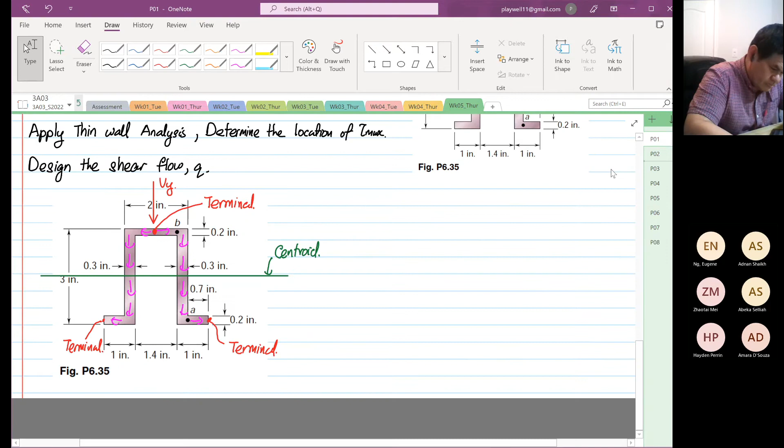And I'm going to paste on the next. Okay, I'm going to take this whole thing across.

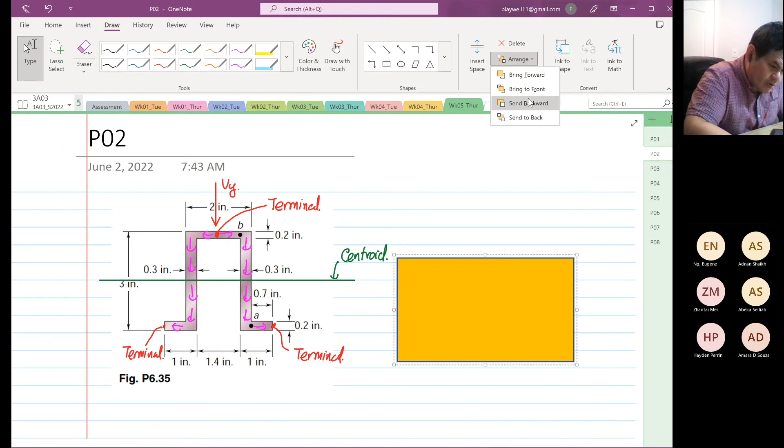If we were to cover the bottom, okay, if we were to cover the bottom, oh, I think I need to bring forward all the way. Okay, if I were to cover the bottom, okay, and expose the top only, right? What does this structure look like?

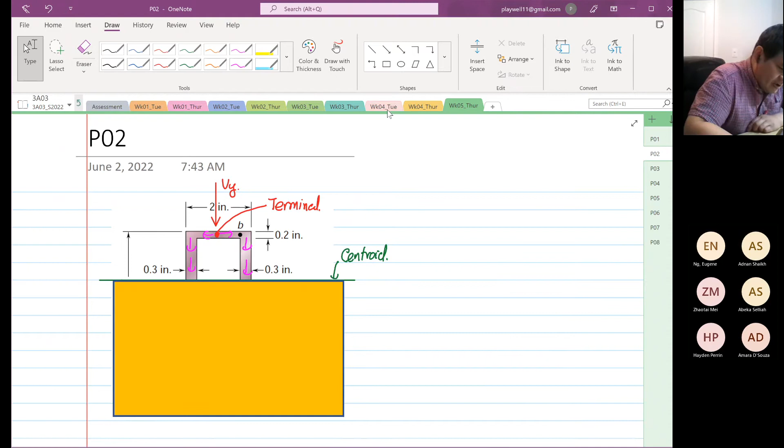Before I give you an answer, I want you to look at this also. Okay, I want you to view this also.

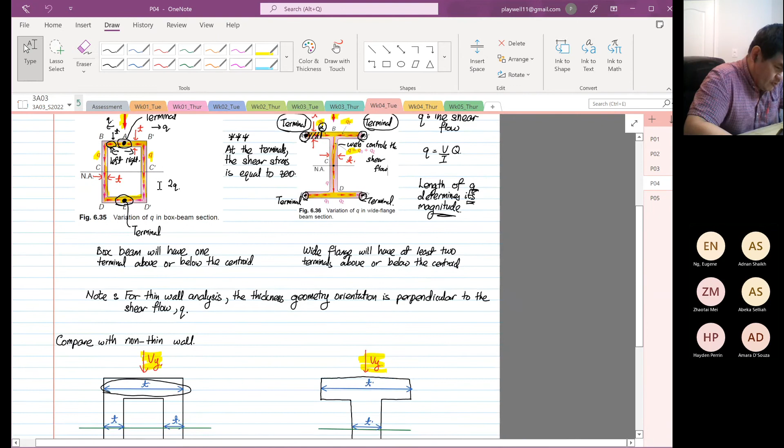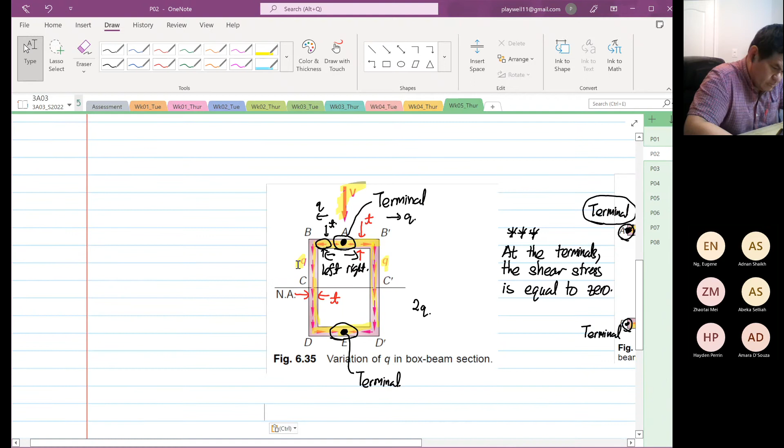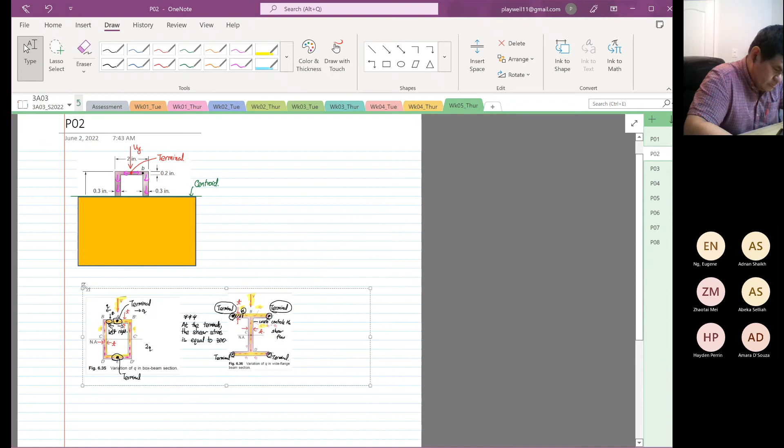And I'm going to shrink it. Okay. So you can observe, right? If I were to cover the bottom, right, the top, what does it look like?

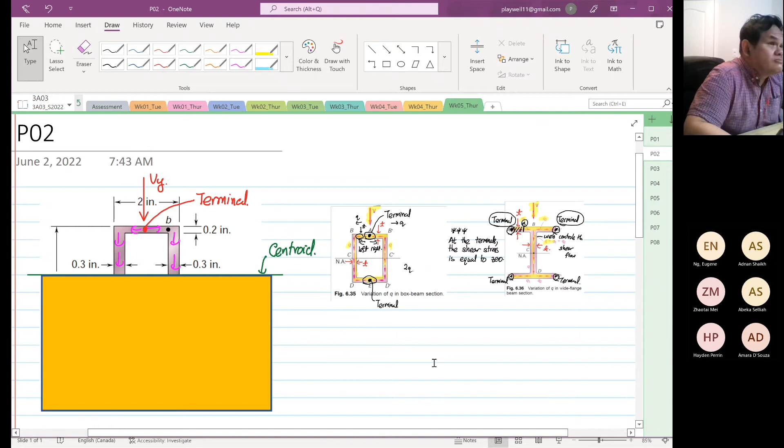Anyone? Is it a box beam or wide flange? Anyone? I hope you're there. Box beam, you are absolutely right.

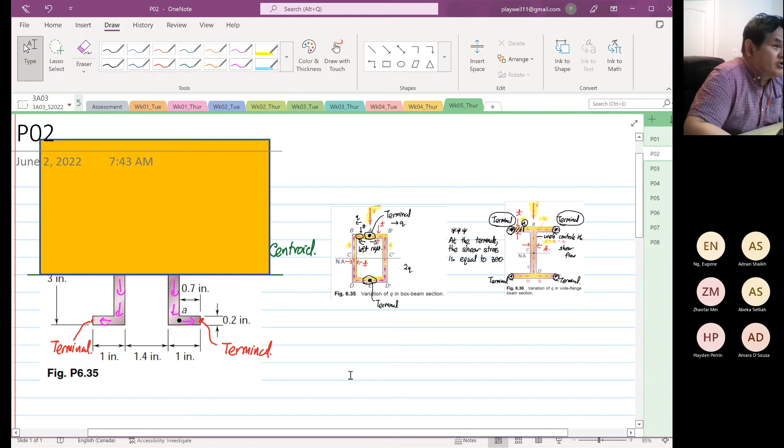Now, if I were to cover the top, right? Cover the top, right? Now it looks like what? Wide flange, yes or no? Right? So that's the confusing aspect of this question.

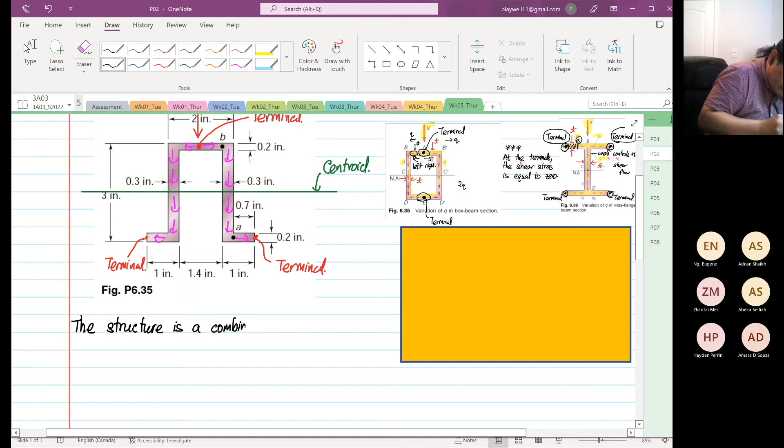Okay, so we realize that this structure is a combination of what? So we realize that the structure is a combination. It's a combination of box beam and wide flange.

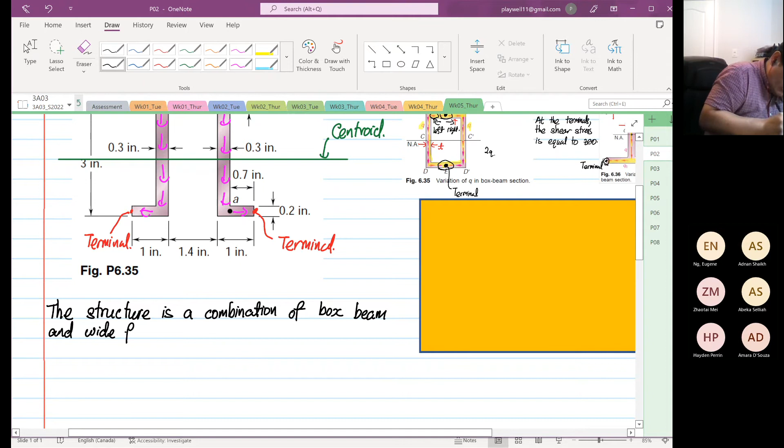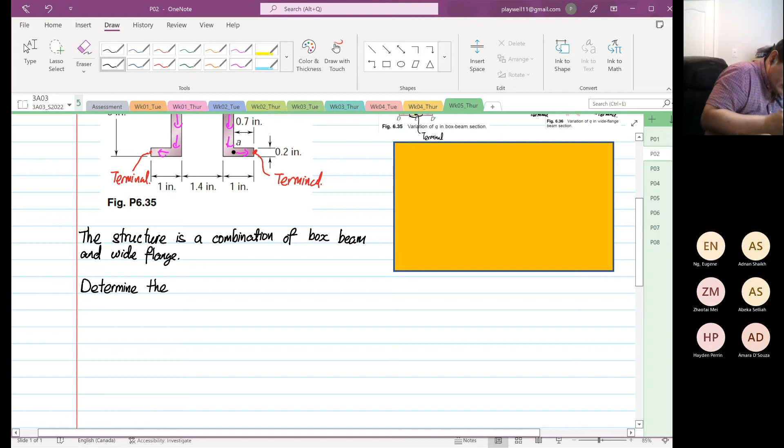Okay, so we are going to find the shearing stress at point B first. So the first thing we're going to find is we're going to determine the shearing stress at point B. Okay, at point B.

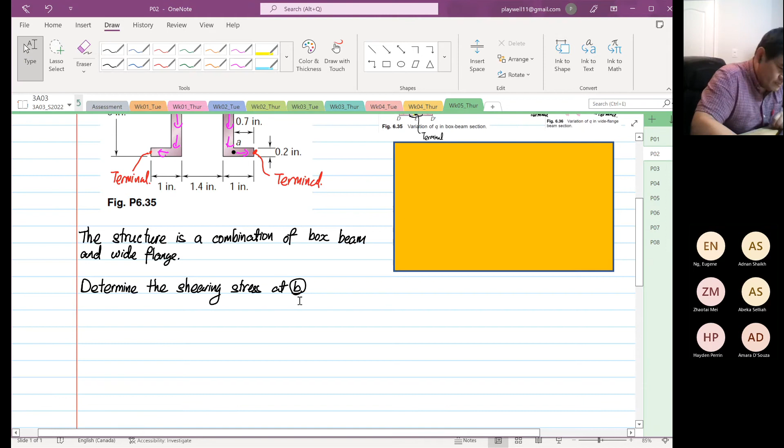So I'm going to again take the whole thing. Maybe I just take the image. Okay, we're just going to find point B.

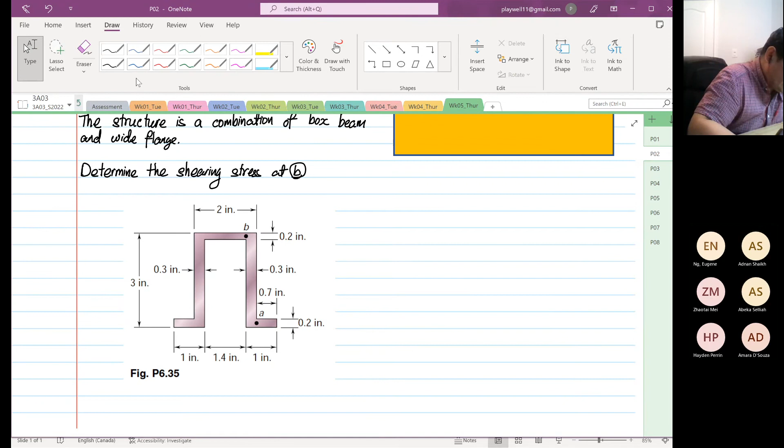Now, based on observation, okay, by looking just based on observation, we can more or less draw where the centroid is. Okay, so the centroid is dead on the center.

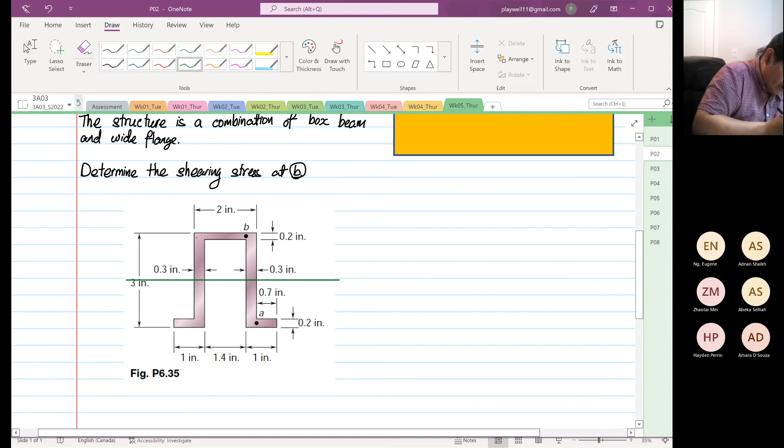Why is it dead on the center? If you look at the flange at the top, it is 2 inch by 0.2 inch, right? So if you look at the top flange, which I'm going to highlight now, right, and if you look at this geometry over here, this is also 2 inch by 0.2.

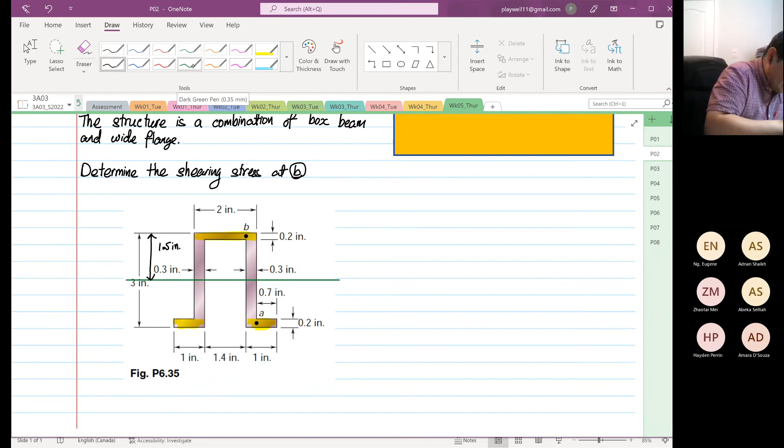Okay, so the first moment of area at the top and the bottom where I put my centroid line is exactly at that position. So we are aware that the distance from here to here is 1.5 inch. Okay, so we know that this is our centroid.

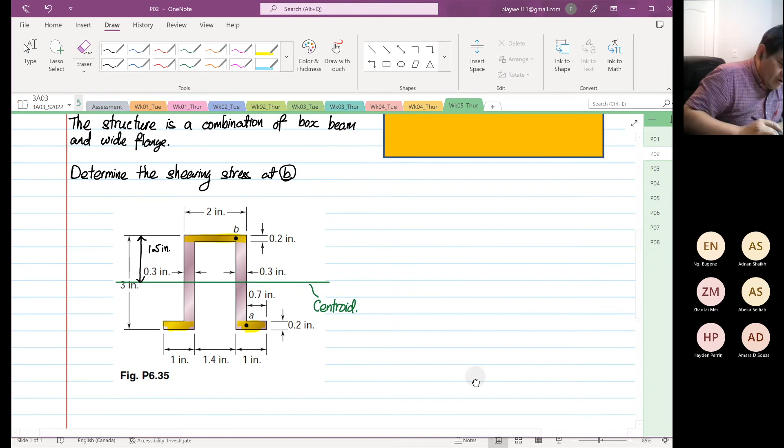Okay, so now we would like to determine the shearing stress at point B. But before I go on, we know that the formula we're going to use is shearing stress is equal to V Q over I T. Okay.

Now, what we were given is that tau max is equal to 10 times 10 to the power 3 psi. Okay.

So if we were to look at tau max or this formula over here, right, we know that the terms highlighted in yellow now, right, these two terms are constant. Okay, they are constant. Now where the location of tau max, okay, so tau max will occur either...

Either at Q max or T min, minimum thickness. Okay, and because we are doing thin wall analysis, at point B, the thickness is in this direction, right? At point A, the thickness is also measured in this direction.

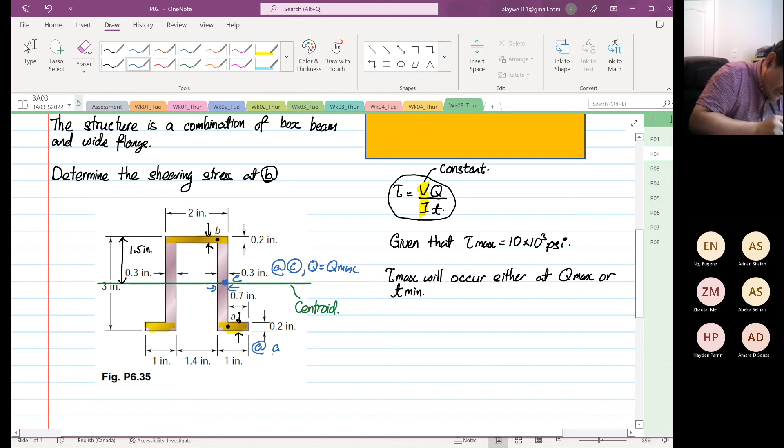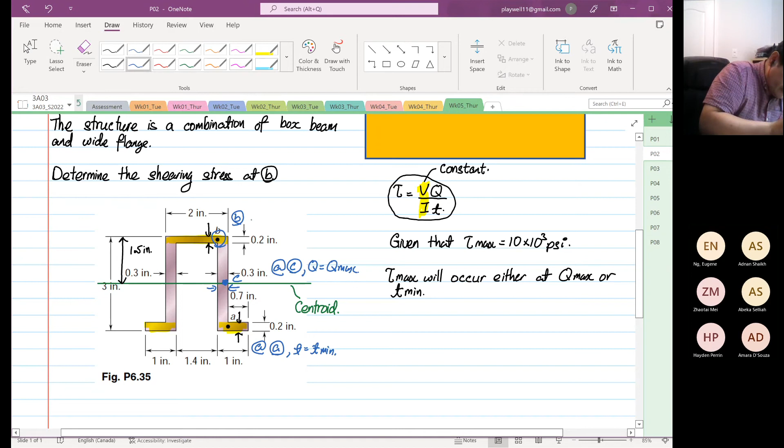But at point C, right, we know that Q is going to be at its what? Q max, right? And we know that at point A, right, T is equal to T min. And likewise at point B, right, T is equal to T min.

Okay, so the statement that we make that tau max will occur either at Q max or T min, we need to check. It's like your term test question, yes or no? I ask you to find the maximum shear at the centroid, and what is the maximum shearing stress, because the thickness is not constant.

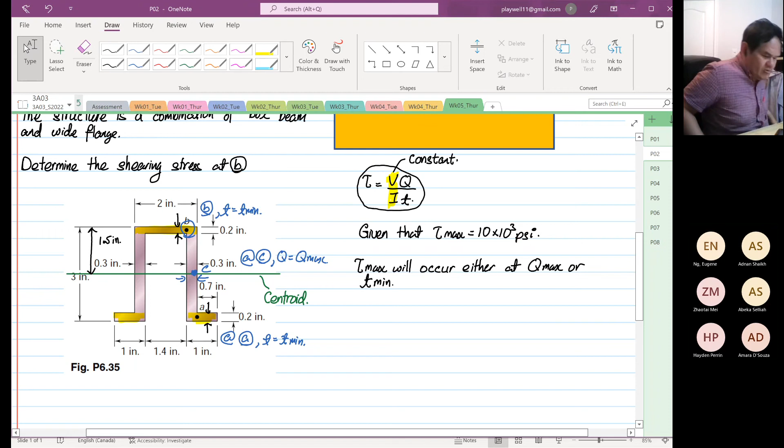Okay, now for this case, we have a thickness of T min of 0.2 and 0.3, right? At point B and point A, thickness is equal to 0.2. At point C, no doubt thickness is at 0.3. However, Q will be at its maximum. Okay, so now we are going to find our shearing stress at point B, point B, and point C.

Sorry. We're going to find the shear stress at point B. So if we were to look at the shear stress at point B, the area we have to consider is this entire area. We are going to consider this entire area over here.

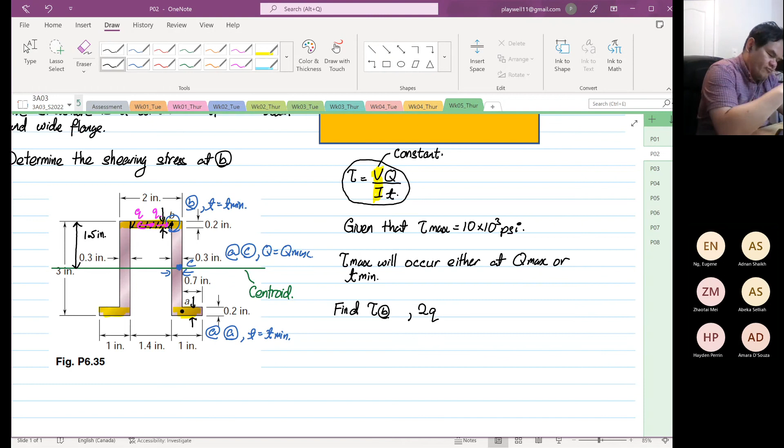Now we want to find the first moment of area of point B, which is equal to width, I like to go with depth multiplied by y bar. I'm going to draw a transformation over here. So this is y and this is z.

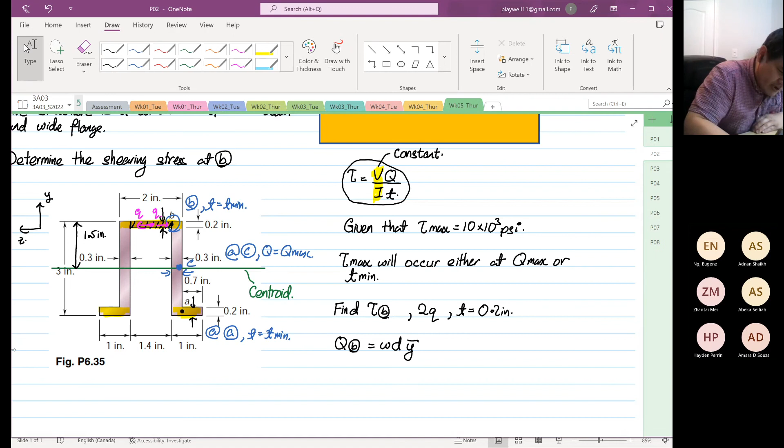Before we say that it's equal to 2Q, if I were to bring this box down, we realize it is a box beam. When it's a box beam, you just declare that this is 2Q. 1Q goes towards the left, 1Q goes towards the right.

From here, it is weird, it's okay. So from here we are going to write down the width. The width is equal to 2 inch minus 0.3 on either side, so 2 minus 0.3 minus 0.3. And then the depth is equal to 0.2, and the y bar is 1.5 minus 0.2 divided by 2.

So this will become 2 minus 0.3 minus 0.3 times 0.2 times 1.4, which is equal to 0.392 inches cubed.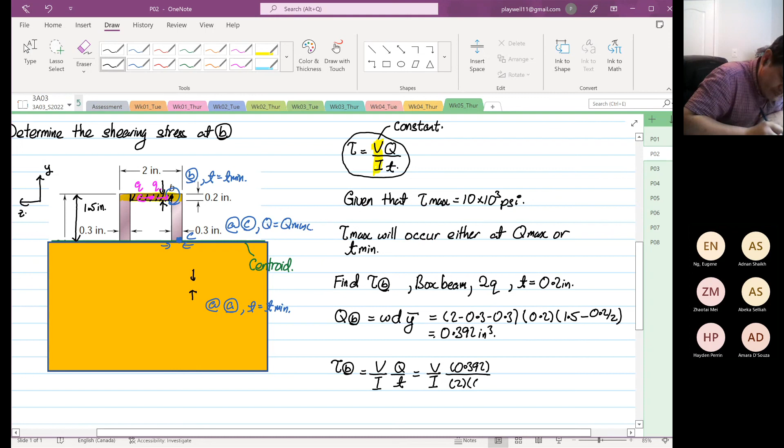I'll write out the formula first. So this is equal to V over I. Q is equal to 0.392 divided by 2, divided by thickness of 0.2. The 2 over here is because we have 2Q.

So 0.392 divided by 2 is equal to 0.98, V over I. So that is the shear stress at point B.

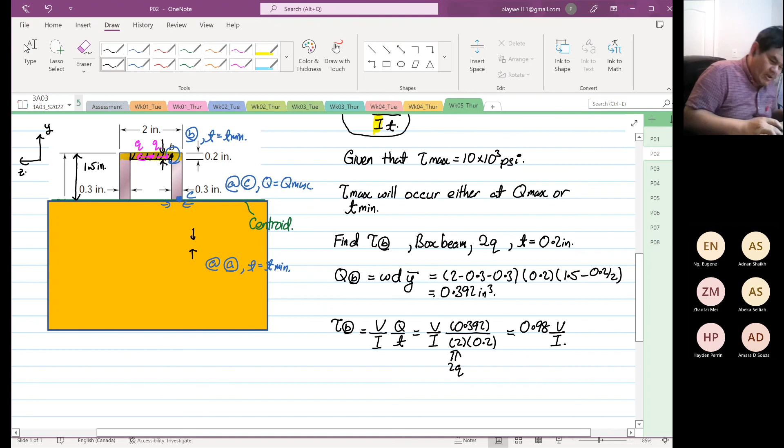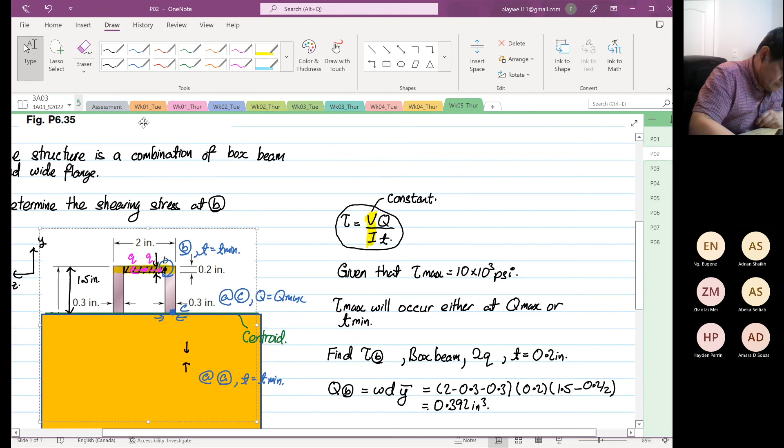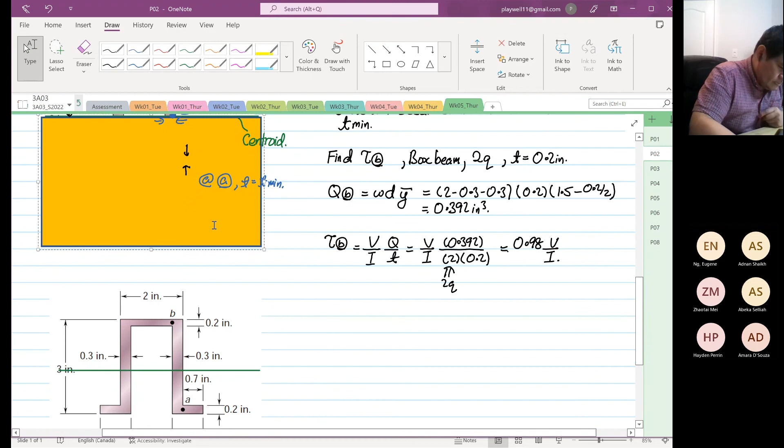Next, we want to find the shear stress at point A. Again, I will copy this diagram, sketch out the position of the centroid, cover the part that we don't need, and then design the shear flow.

Now the left and right are independent. They are not connected, so this is our terminal, and this is also our terminal. The terminal on the left is not related to the terminal at the right at all.

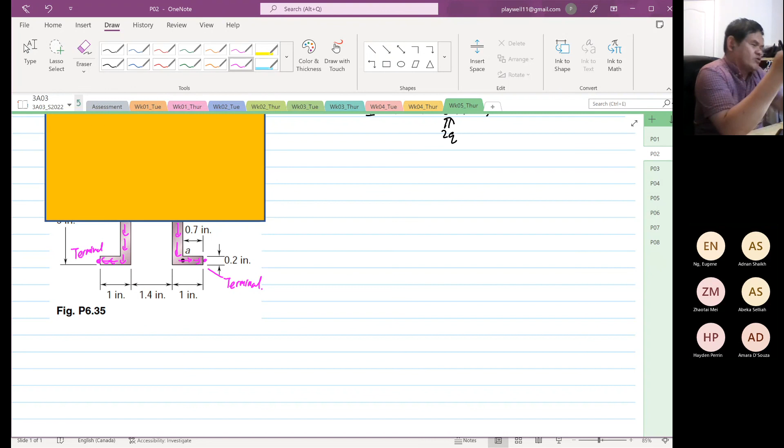And why is that? Why can we just analyze it this way? Remember the rules that we stated: the first moment of area cannot cross over the centroid, yes or no? That's why we don't look before the centroid, especially at this stage when we are analyzing point A. For this reason, we can isolate the top and the bottom because all of this is because of the first moment of area.

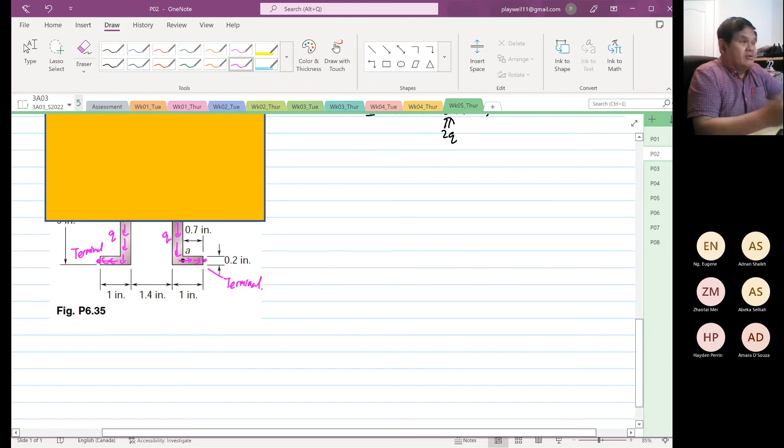Now, so the Q on the left hand side and the Q on the right hand side are independent. So for this case, we know that we're going to find the shear stress at point A. It's going to be, we are going to use wide flange analysis.